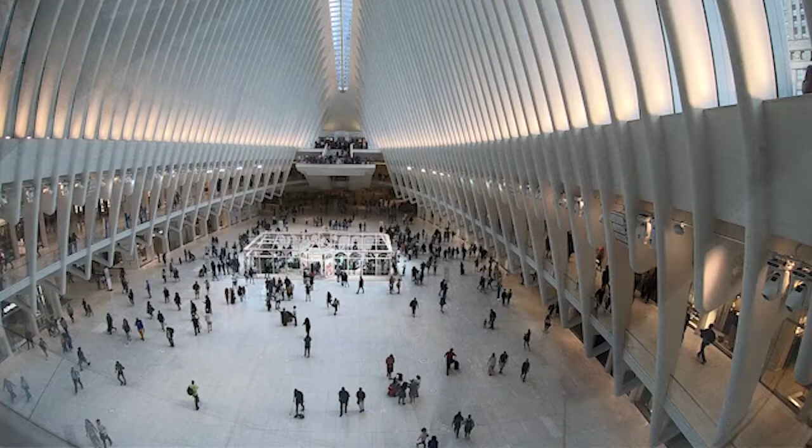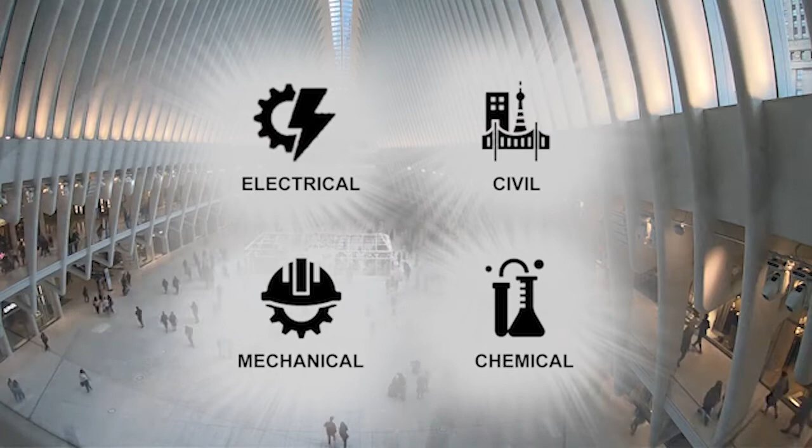Engineering is a profession that is vital to the advancement and upkeep of modern society. Engineering is commonly divided into four main branches: electrical, civil, mechanical, and chemical. Today, we are going to delve into what a mechanical engineer is, does, and how to become one of the fine people working in the broadest, most popular field of engineering.

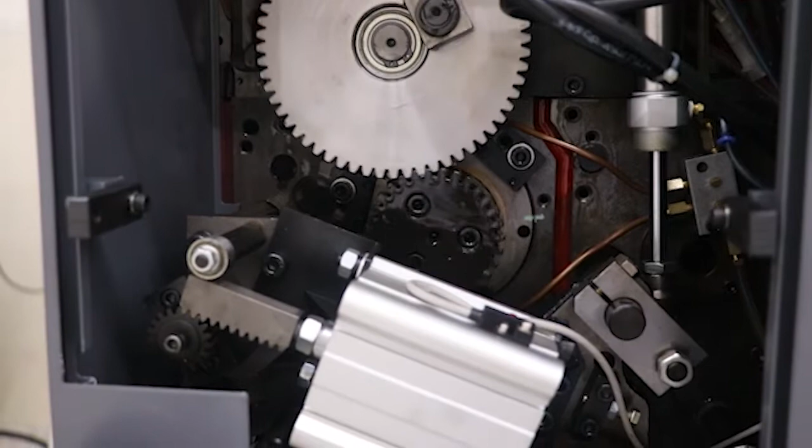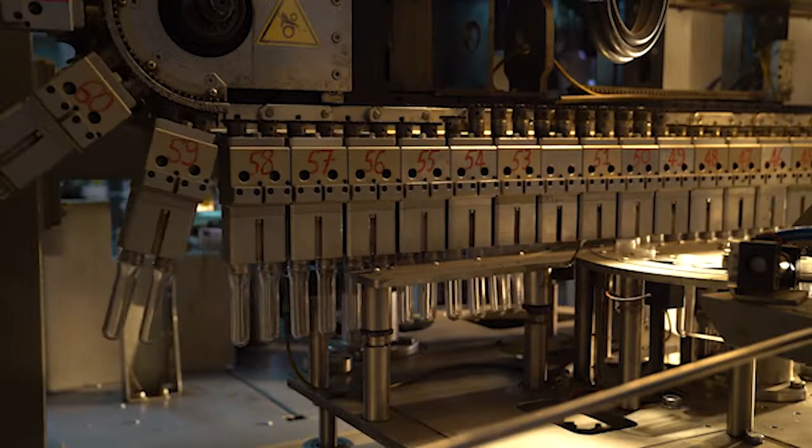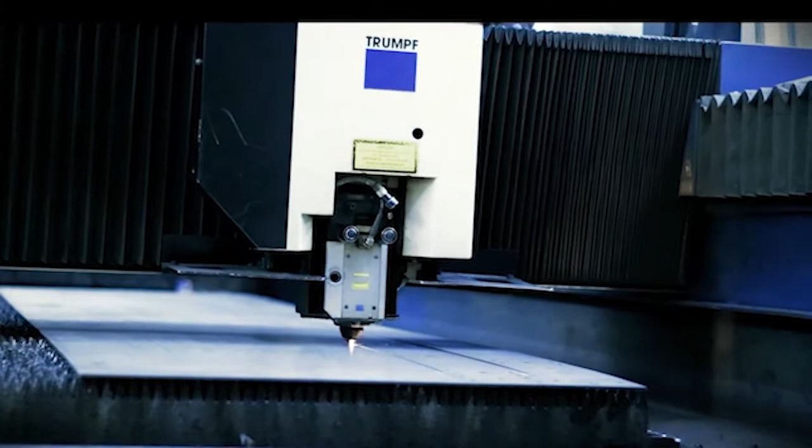Mechanical engineering is the study of objects and systems in motion. It applies the principles of heat and mechanical systems from design to manufacturing to the market for any product. To do this, a mechanical engineer must consider the forces and thermal environment that a product or the system to which it belongs, and designs the product for function, longevity, and aesthetics. It is one of the four engineering branches and is arguably the broadest.

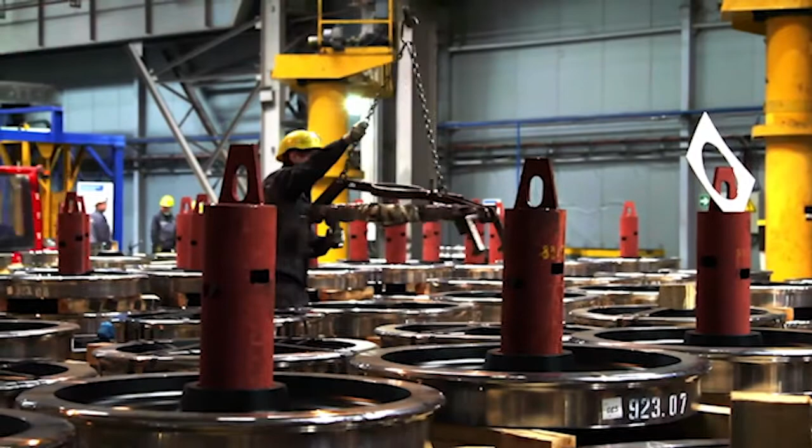The field of mechanical engineering requires knowledge in mechanics, dynamics, thermodynamics, material science, and structural analysis. There are many sub-disciplines that fall under their purview. Manufacturing, thermal, and energy engineering are a few. Projects from other branches of engineering tend to rely on mechanical engineers, since their work is more practical and hands-on. Nearly all major or large-scale engineering projects, such as dams, aircraft, or manufacturing, use mechanical engineering for designing and building moving parts and systems.

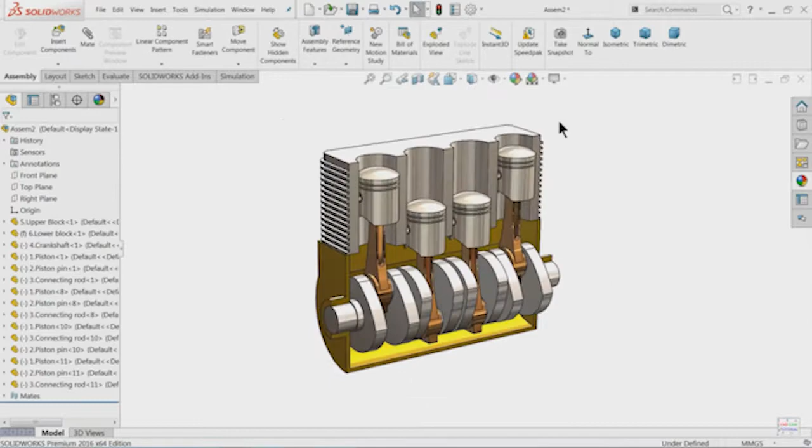A project mechanical engineers are expected to work on is an engine, which converts one form of energy into mechanical energy. An internal combustion engine, such as the engine commonly found in most cars on the road, burns fuel to do work. That work is used to drive the car. This type of engine can be found in ships and aircraft as well.

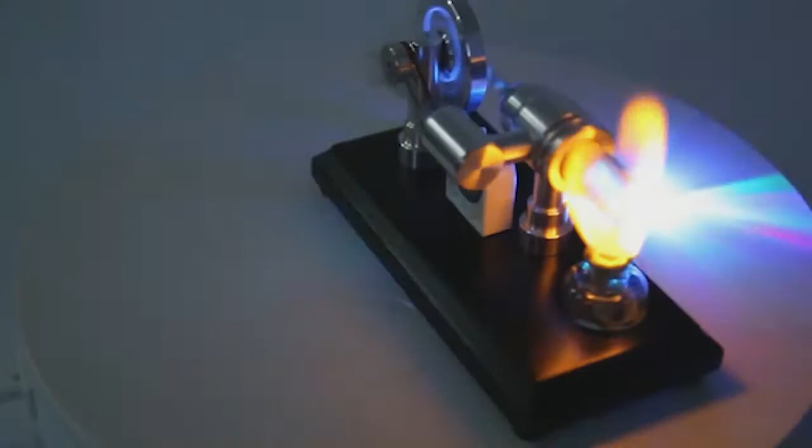An external combustion engine, which differs from an internal engine by the source of the heat, is commonly used in power plants. Coal-fired, natural gas, solar thermal, and even some nuclear power plants are designed around a basic external engine.

To obtain a career in mechanical engineering, students will require at least a bachelor's degree. The coursework that you will take in your undergrad will be fairly typical. You will take a lot of math and science classes up until about your third year. While in school, you will cover subjects such as fluid mechanics, thermodynamics, and hydraulics.

Generally, the schools that you go and get your bachelor's degree from will be accredited by the ABET, which is the Accreditation Board for Engineering and Technology. However, if the school is not accredited with the ABET certification, you will need to get that on your own.

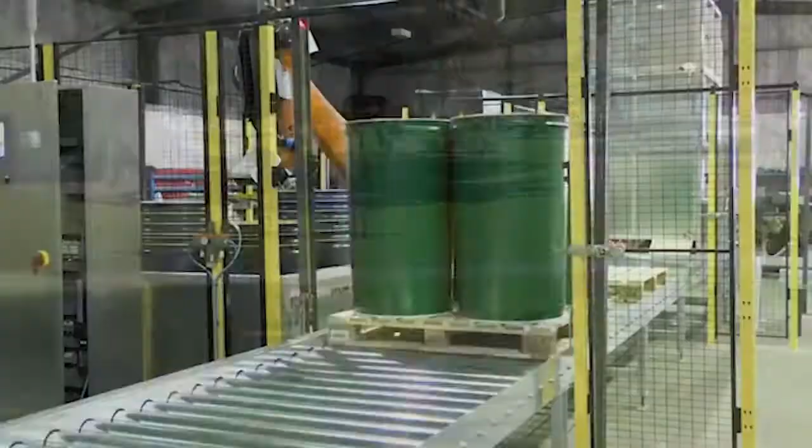After graduation and getting your accreditation from the ABET, you will then need to become professionally licensed as a professional engineer in whatever state you are working in. The PE requirements include a bachelor's degree from a four-year institution with ABET accreditation, work experience under the supervision of a licensed engineer, and candidates must also pass the Fundamentals of Engineering and Principles and Practice of Engineering test exams that are administered by the National Council of Examiners for Engineering and Surveying.

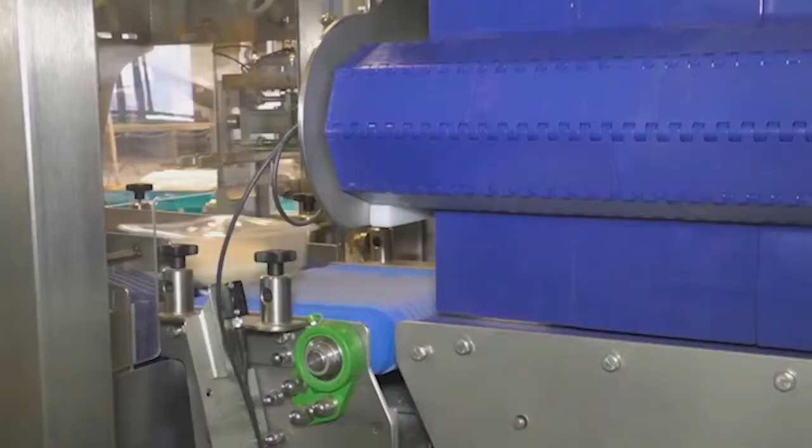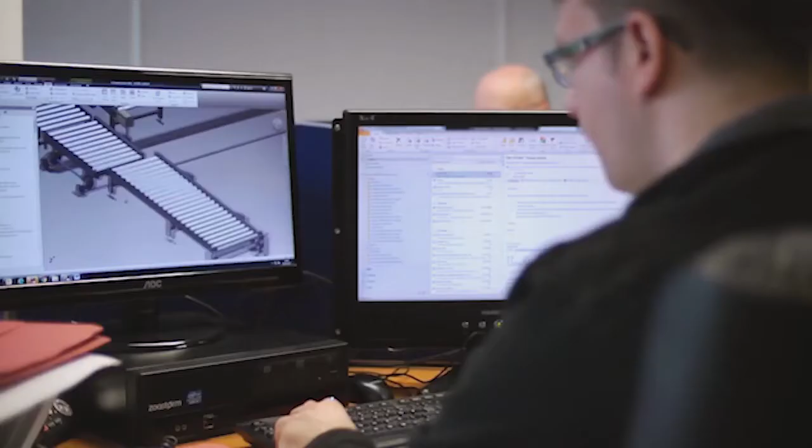Before you can obtain your license as a PE or professional engineer, you must take the FE exam. The FE exam stands for the Fundamentals of Engineering and includes 110 questions as well as takes 6 hours to complete.

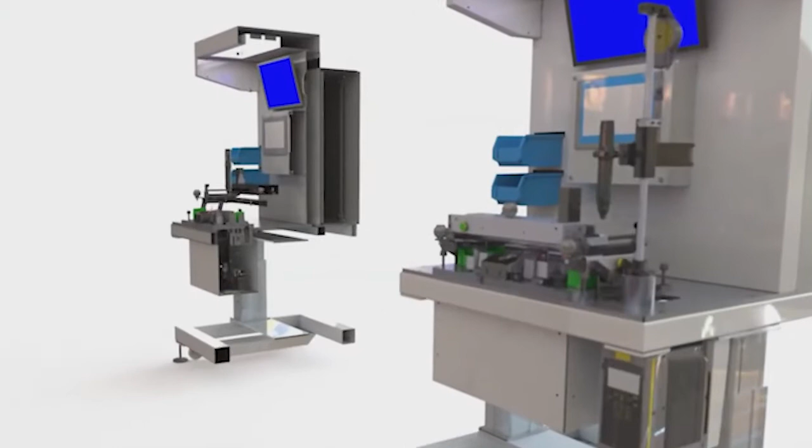A typical Bachelor of Science in Mechanical Engineering degree requires courses in communications, humanities, basic sciences, business, mathematics, and basic engineering and computer skills. These can include composition, technical writing, history, language, political science, chemistry, physics, accounting, or marketing.

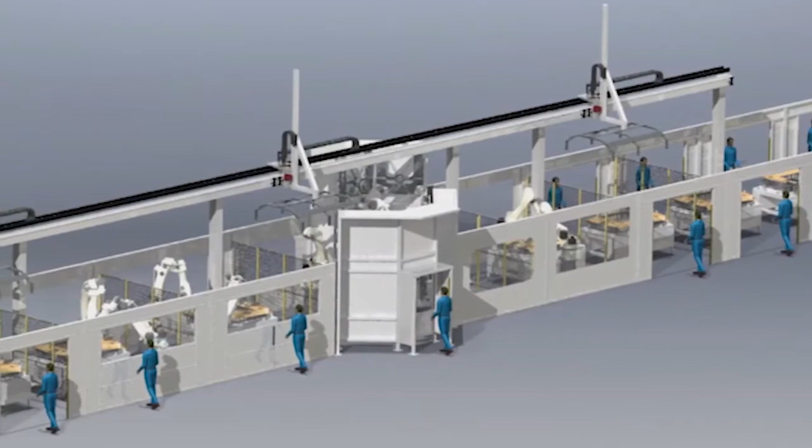Almost every state-ran school has an engineering department, with Stanford, MIT, and Brown being the top three as of August 2020, according to collegechoice.net. There are a number of certifications you can receive after you become a professional engineer, such as solar heating installer, certified maintenance and reliability technician, certified manufacturing engineer, certified plant maintenance manager, fluid power engineer, IAPMO mechanical plans examiner, or a chassis technician, just to name a few.

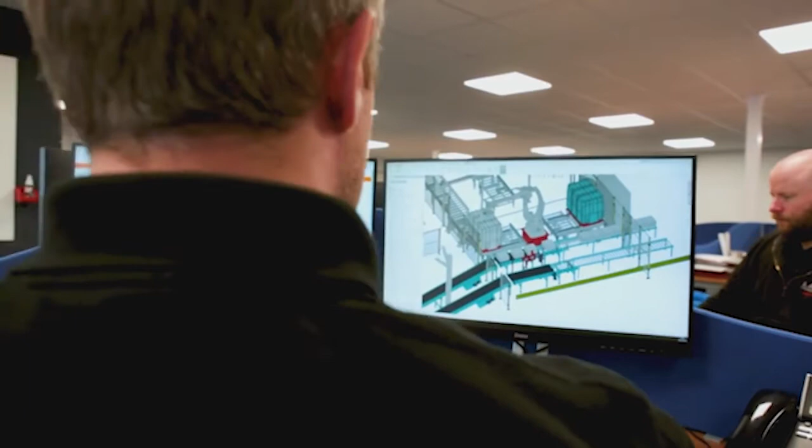One of the other things you will do once you become a professional engineer is to sign up for different organizations that help you in a professional manner, such as the American Society of Mechanical Engineers, the Institution of Mechanical Engineers, Society of Automotive Engineers, or the Society of Manufacturing Engineers.

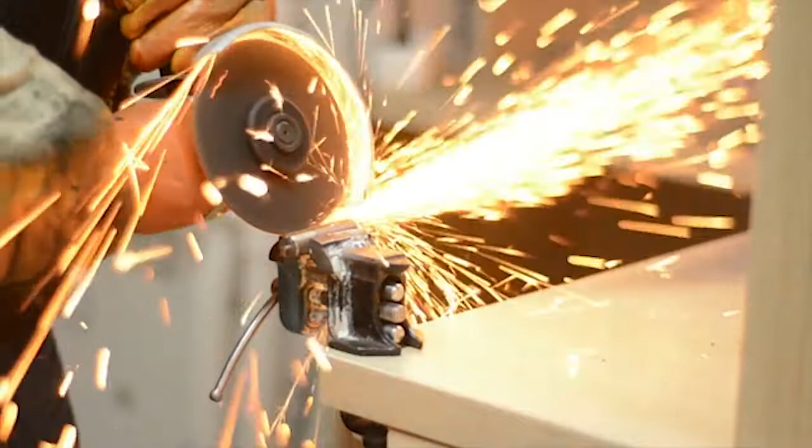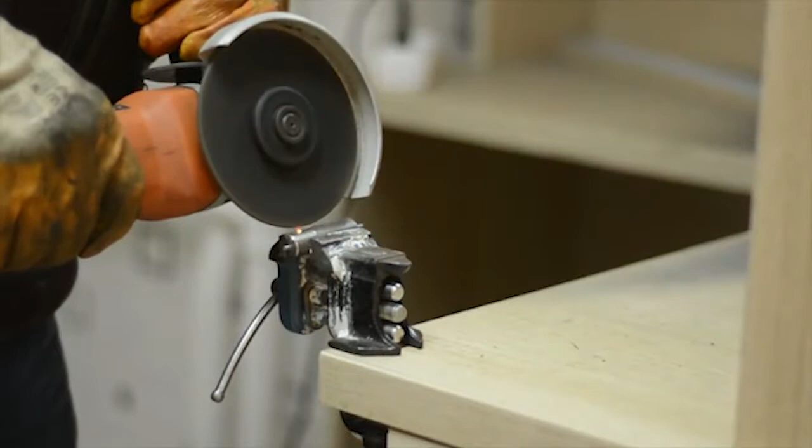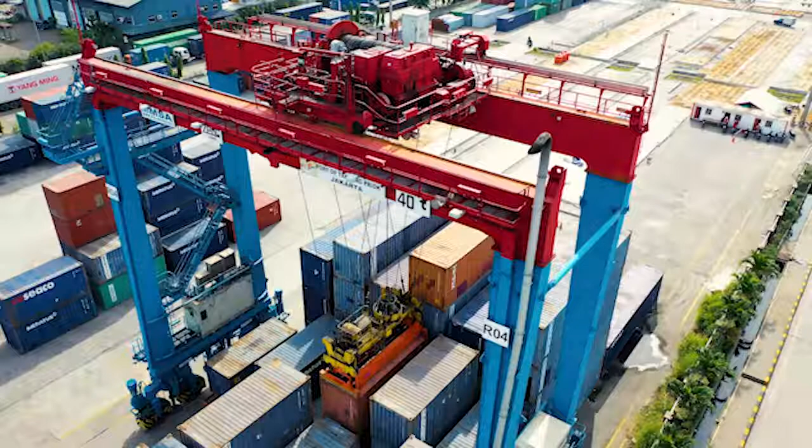As we have seen, mechanical engineering is a highly versatile degree, and mechanical engineers are often dubbed the jack of all trades, using their broad range of skills to solve problems in design, analysis, and manufacturing using mechanical systems. Mechanical engineering is heavily physics-based, relying on a strong math and calculus background. Industries hiring mechanical engineers encompass automotive, HVAC, materials, robotics, combustion engines, and the energy sector.

Even though it is the most popular specialization for engineers, it does have one of the lowest median salaries at $87,000 a year, and its annual growth rate is comparatively low at 4%. In contrast, the job market is relatively large, with about 312,000 jobs in the US, so there is a lot of freedom when it comes to job selection.